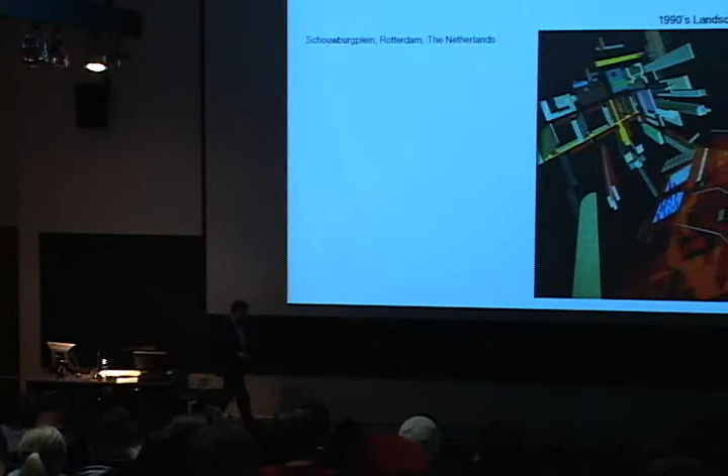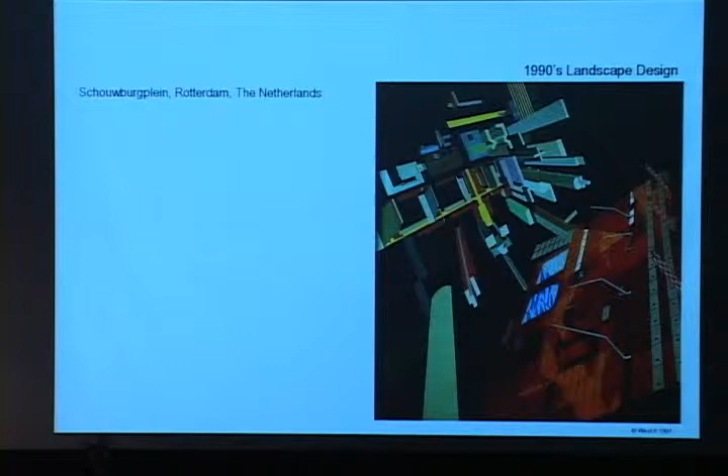The next stage was the 90s when I graduated, and people like Zaha Hadid or Daniel Libeskind, who were theorists and intellectual designers, used their graphics to come up with their own theories in design, and now they're actually practicing architects. On the same note were people like West 8, Adriaan Geuze from Holland, whose work really exemplifies, particularly in landscape architecture, how visual graphics at the time in the 90s was really the message forward.

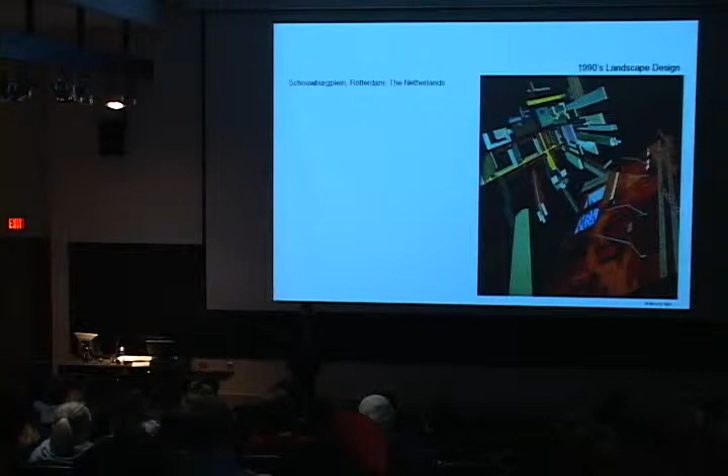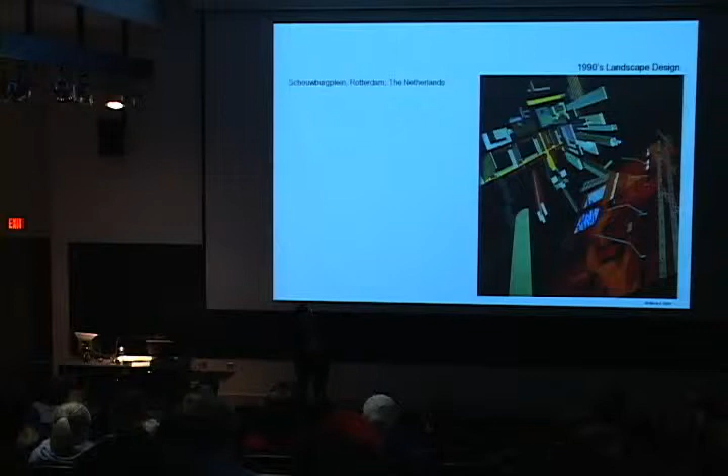It was also the time when, for example, the magazine Topos was created in Germany, which is now available in English. When it started out as a mission at the start of the 90s, it was only published in German, and it was the mission of the editor to actually make it an international journal. It was with these kinds of images that the journal actually got the respect. I thought I'd just recap a little bit on this.

Then we came into the 2000s, the change of the century, and there were people like James Corner who looked, obviously with the reflection of the 90s, at graphic design, but they started to look at design in a much more holistic way.

The way the Fresh Kills site just outside New York exemplifies that in his competition proposal and winner is just one example I wanted to show you as a sort of reminder.

The great thing about his work, apart from looking at it in different layers, is that he also put a time scale to his work. For example, he looked at how a site could be used over the time period, how different parts of the site would change through the involvement or development of the plants, how these spaces would be changing, and how the site could then be used. So he actually put a time scale on it, and there are diagrams.

If you look and read up his stuff, you can actually see that—I always teach that to my students. So he started, apart from looking at it from a graphical point of view, looking at the holistic system.

That was my mission, my vision, having practiced landscape architecture for 17 years—that it was not enough to do graphic work, to look at forms, but we really needed to start to understand the science and the systems holistically as a whole. So just to give you that as background information.

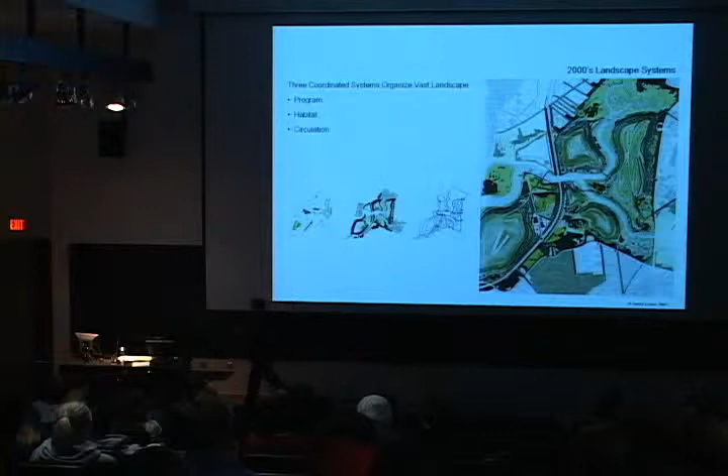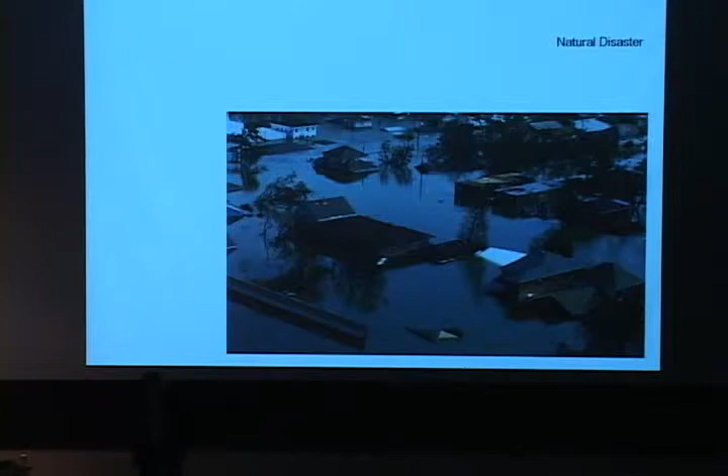Then in the same period, the disasters intensified. We all know that, particularly things like Katrina, which caused disasters in New Orleans. Even then, the then-president Bush acknowledged that the environmental impact and the environmental message from landscape architects was important. That was also an initiative for me when I was thinking about the research we were going to do.

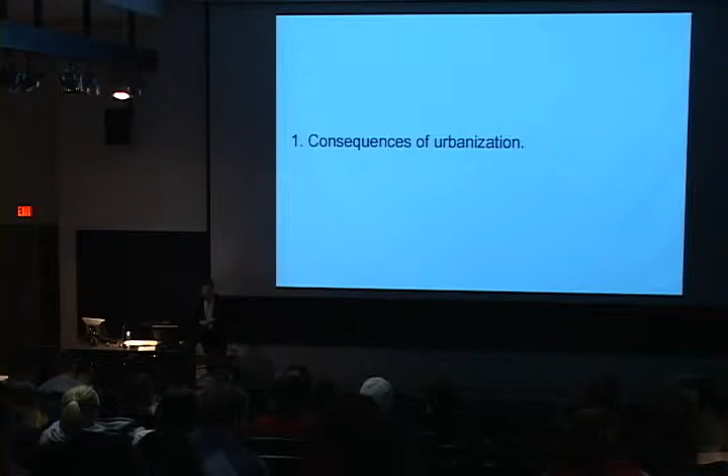We all know last year in 2008, it was the time when the urban population actually was higher, peaking higher than the rural population. So the rural population now is on the decline, while the urban population is on the rise.

So what do you do with all these people? Where do you put them? How do you feed them? Particularly in a city like Vancouver, which is bordered by the sea and by the Rockies, which are literally not buildable on, because being in an earthquake-prone area, this has to be on the flat land.

So densification, obviously, is the answer for this. And with this densification, we all know that has an enormous impact on the environment in the cities and on the environment of nature.

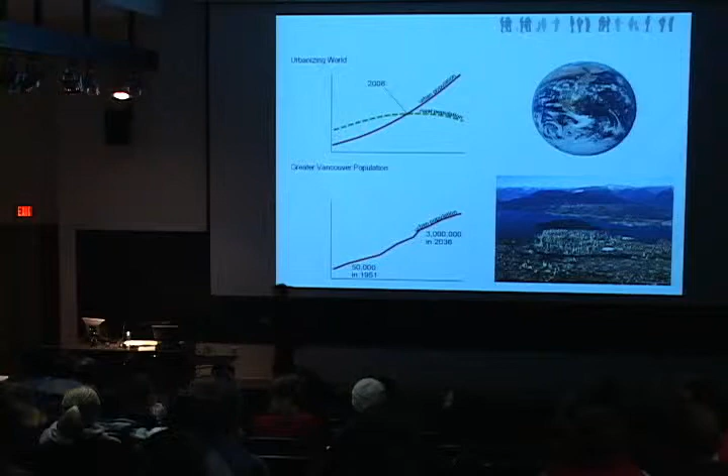So the urban destruction, and with that, the habitat destruction, is still going on. I flew into Atlanta at Christmas to change planes, and this is the sort of images I saw from the plane, and that made me aware again that we still have a long way to go, and we have to really learn to understand the systems. That encouraged me as a landscape architect to go into the science side and really understand the figures, to actually persuade, with the research we are doing, the policy making of the governments. That's the real reason for the research we were thinking of.

So we started to look at it more specifically. What is actually the impact on cities, and what happens if the city gets all this imperviousness? Well, we know sewer overflow will happen. We're going to have flooding, and we will have a degradation of the water, which is the key issue. Food and water is going to be the key issue of this century. I'm quite sure about that.

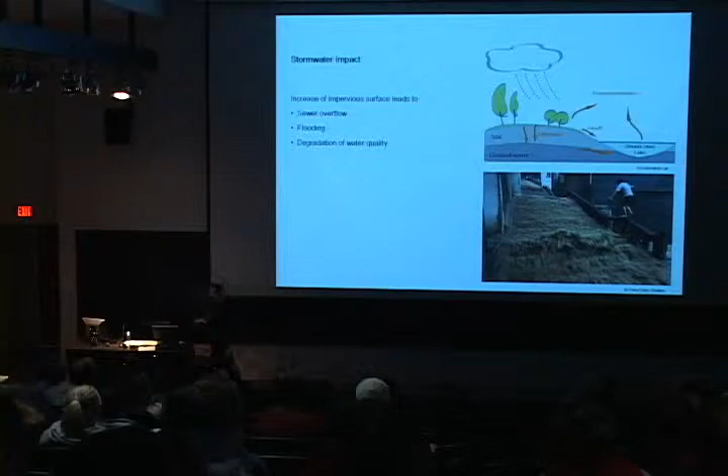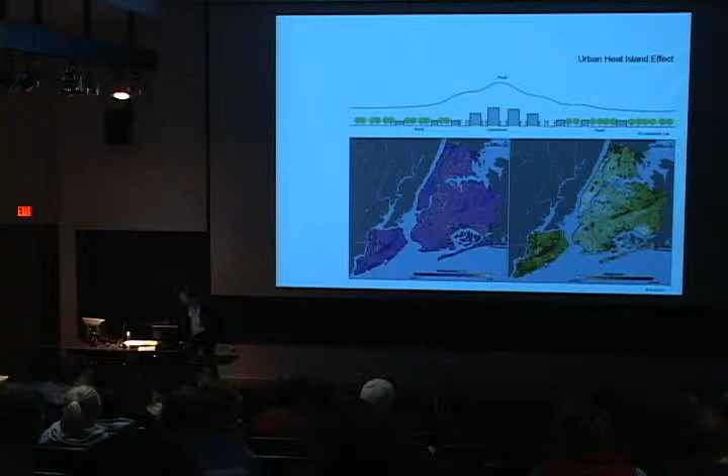I did that together with Herbert Dreiseitl. He was in charge of the lake and the water features, and we were in charge of the extensive and intensive green roof areas. It was a project which went on for 7 years. In 1995, this was quite cutting edge, in the sense that the water we actually harvested on the project was used on the project.

And we also, I had students as second advisor, where we did long-term research after the project was finished to look, for example, at mature trees, how they grow on roofs, and how they function. So this project was the sort of first breeding ground for me about thinking about science and the importance of science in a scheme like this.

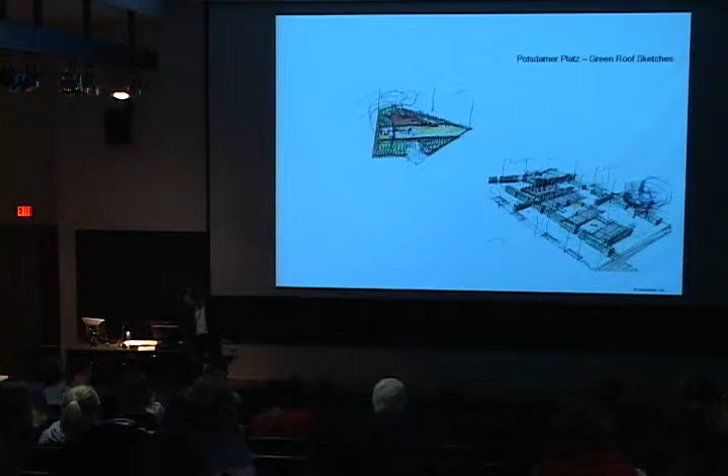This is just another image of the project, and another image that we did all the usual stuff. We did all the design, we did all the sketches, we did all the specs, we did all the stuff one does. On top, we looked at the durability of the materials we used, how they would weather. So I had tests being done on weathering. What kind of wood do we use? Is the wood poisonous or not poisonous for the children play areas? Are there nails in it or not? How do we do the fixing?

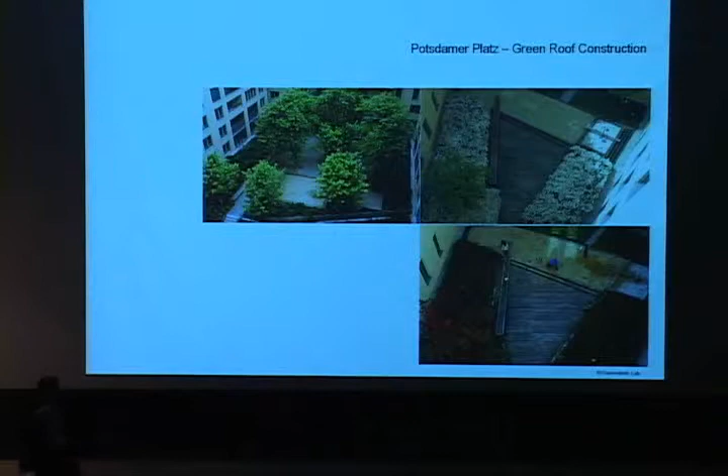So all the sort of basics a landscape architect does. We looked at how the plants over the time of the year would actually grow. I've seen upstairs people looking at charts. I saw in one of the studios today looking at the autumn color patterns, the spring patterns. So we did all that. What you are taught, we actually then tried to practice.

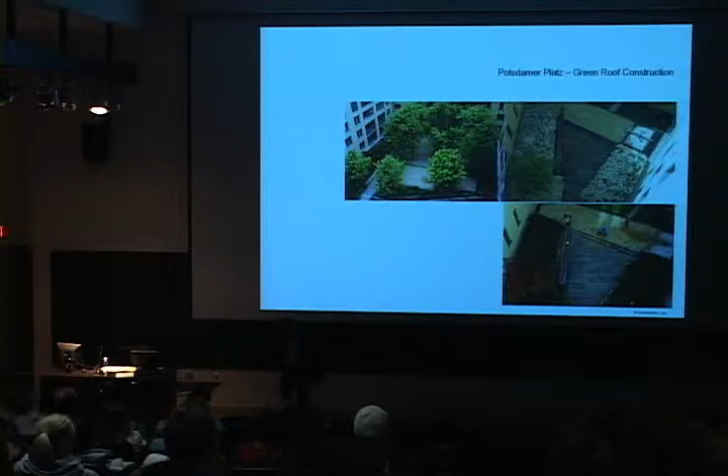But when I was doing this, I was thinking, hey guys, that's not enough.

This is another project I did after the Potsdamer Platz with my mentor. She's a very old landscape architect now who's been in practice for 50 years. And we did this work together. It's also an intensive green roof in Berlin.

But when I was doing all this, I was thinking, hey, is this actually environmentally friendly? Because we're putting in a lot of energy, we're putting in a lot of material to actually create these features. It needs lots of water. So I was thinking when I went into full-time teaching, well, we need to measure this. This is not enough. We all talk about green roofs. It's going to be the healer. I said, well, I really want to know. And is this the right city to actually have green roofs? Because is it an added-on technology?

And obviously, I got lots of criticism, particularly in Germany, where green roofs originally came from, with Switzerland. It was devised in the 70s, really, and it was used for car parks to cover them up so they could be used as gardens and so on. But I always had that question, is it really sustainable?

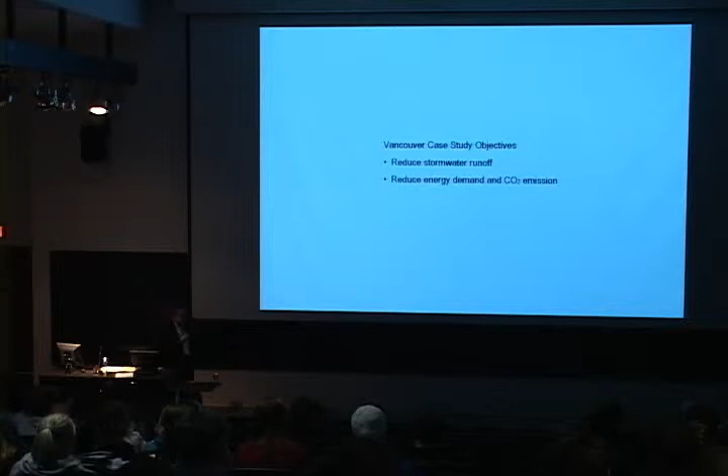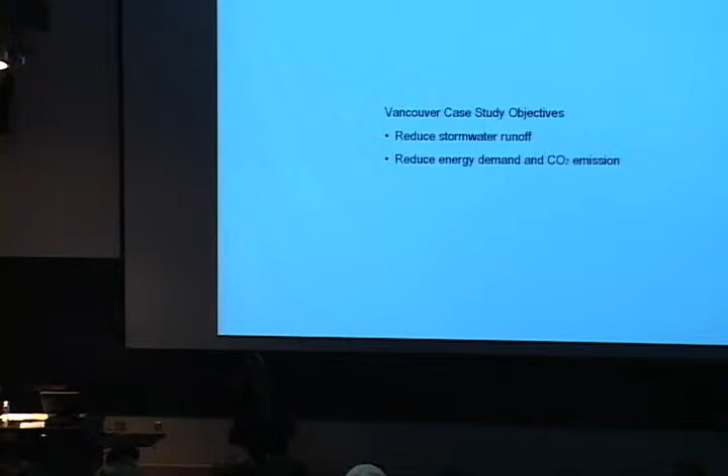So with that in mind, we started our research methodology. I said, okay, we have Vancouver downtown, and we're going to look at Vancouver and see how we could reduce the stormwater runoff in the city of downtown Vancouver. And also, how could we reduce the energy demand and the CO2 emission? Because our mission was, we wanted to measure the environmental benefits green skins actually have in a city. How could we mitigate that?

So we chose, I asked the city government to give me maps. These are very special maps, used by the police for drug trafficking to check where they actually track traffic. So when you zoom in on these maps, you can see every stone on the roofs. These are high-resolution, high-end photographic aerial maps, very sophisticated. Normally you don't get them, and I asked and said I need it for environmental benefits. It's really safe, I'm not into drugs, I want to use it in a positive way.

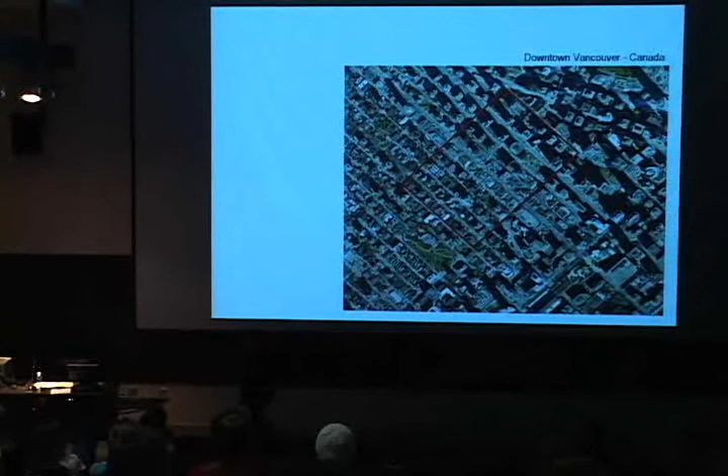So what we did was, I said we're going to take a piece of the downtown core and we're going to measure all these issues. So I chose a site which had all the different building typologies in it: high-rise, medium-rise, and low-rise buildings, as you can see on this section here. And to give you an idea, this is the whole downtown of Vancouver, and we're just looking at 20 hectares of that downtown.

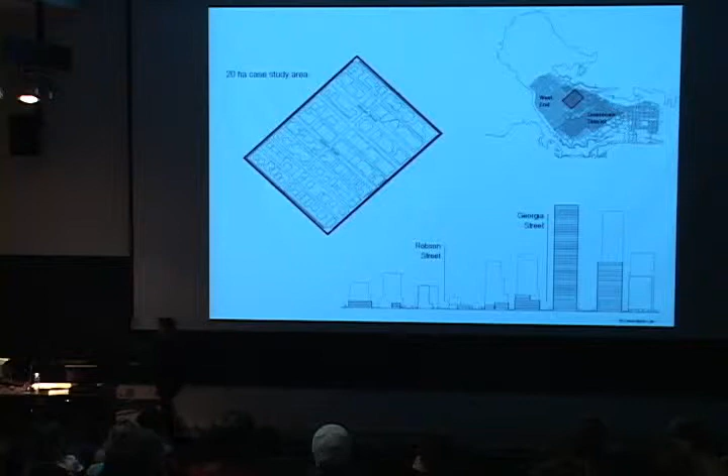So what we did was, the first thing we did was to find out how is it used, how is this area used. So we went to every apartment, and it took a long time, to look at how it's either commercial, residential, office, hotel, townhouses, parking, church space, whatever it is, and made this map so that we knew what was actually going on at the site. The second thing we looked at, and we simplified it in this diagram on the right, we looked at what areas were specifically commercial and what areas were specifically residential.

With that knowledge, and the knowledge of calculating all the roof areas, all the facade areas, and all the floor areas of all those buildings, we were able to calculate the CO2 emission of this 20-hectare area from the electricity and the gas.

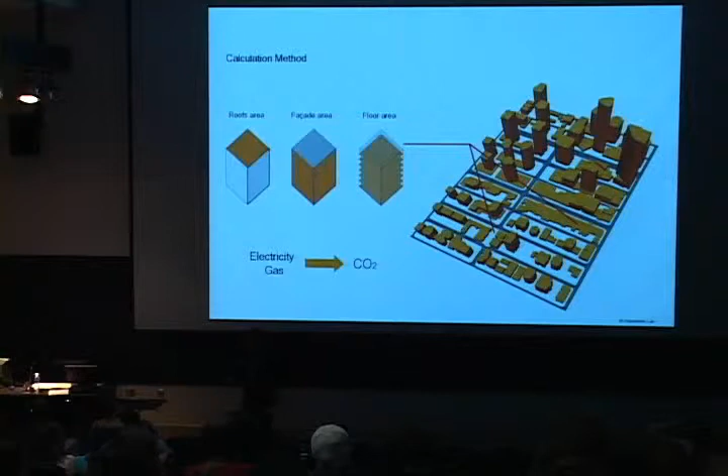How did we do that? We asked the companies to send us all the gas bills of each building, so we were able to calculate how much energy actually was consumed by each of those buildings. I'm not going to go into detail, it was a lot of number crunching.

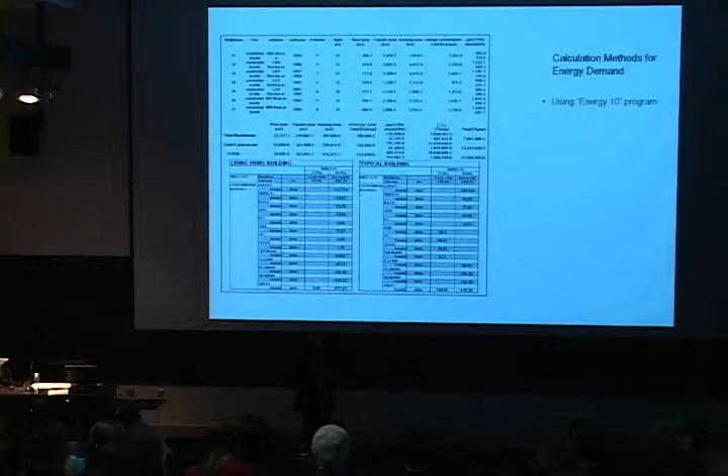For that we used the Energy 10 method. That's one of the methods - there's many, Ecotect, Energy 10 is one of them. It's a simulation program where you can generate these figures, and that would be another lecture to explain. But what this program does is give you a specific simulation of what the actual output is.

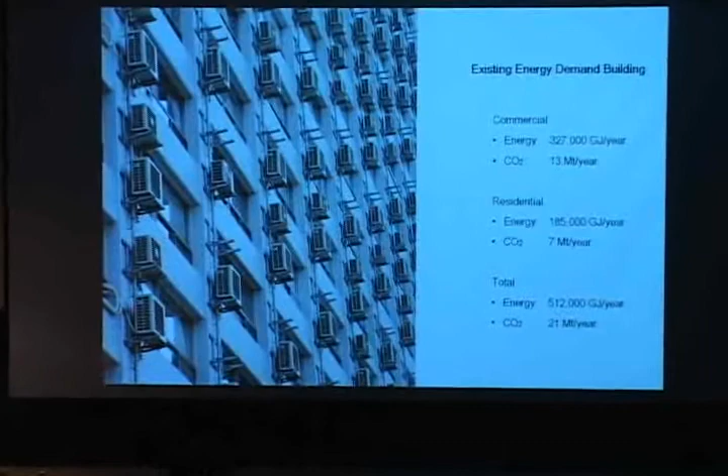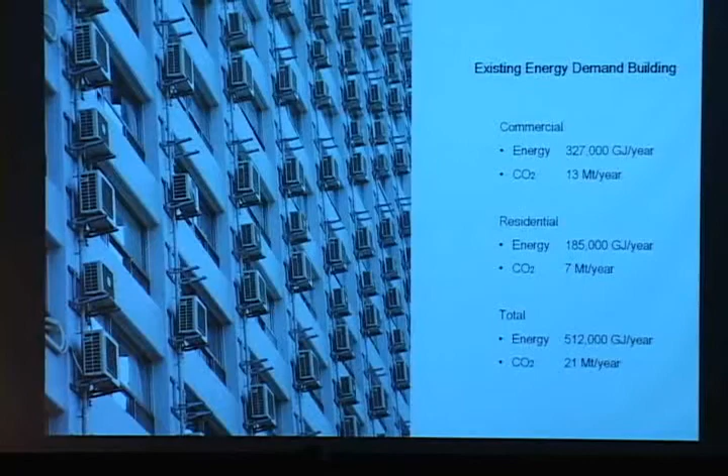When we looked at the result, I'm not going to go through all the figures, just the two main ones: the energy that area needed for heating, cooling, and so on was 512,000 gigajoules per year. And the CO2 emission, which is quite stunning for me, was 21 million tons a year, just for the 20-hectare site. We were a bit shocked about these figures and thought it's really time that we do something about that.

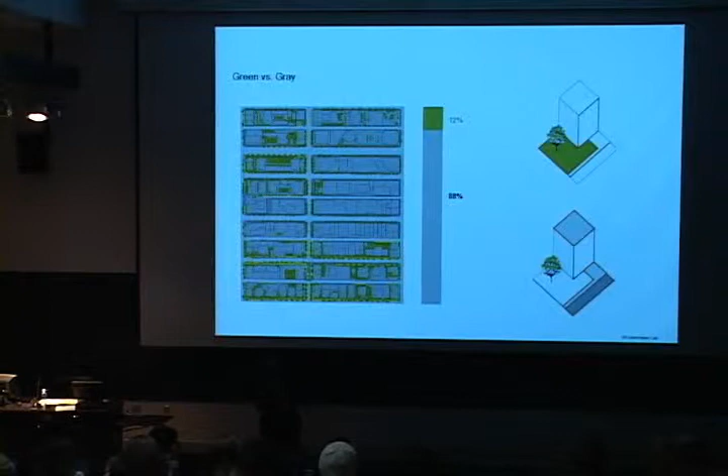So the next thing we looked at is green versus gray. We looked at the site, which part is actually covered by roofs and has an impervious layer, and which part has a connection to the soil. We found that only 12% of the site had a connection to the soil, and 88% was impervious.

So what we did next was calculate in the area all the facades, all the roofs, all the streets, and all the green levels, to work out how many hectares of space we had in each. With that knowledge, we were then able to calculate the stormwater runoff.

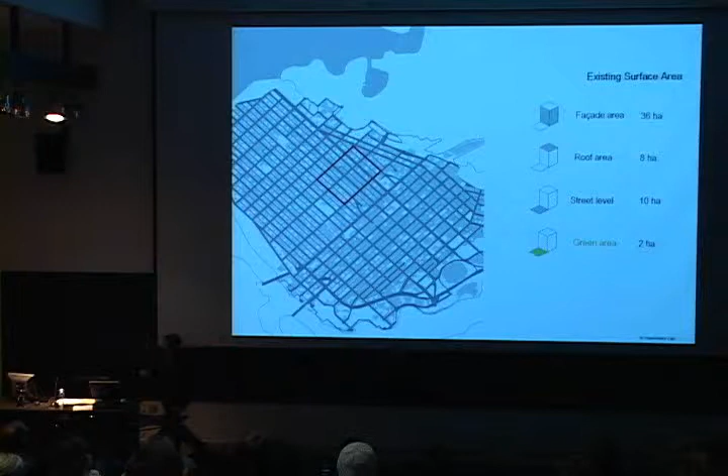For the stormwater runoff, we used the TR55 or CN method. The CN method is the curve number method and the crop coefficient method. The curve number method measures the imperviousness or perviousness of the soil, and the crop coefficient method calculates the evapotranspiration rate of the plants - sorry, it's a difficult word.

So together we developed these formulas. One of my research students spent two years devising a formula methodology to calculate, together with the coefficient and what kind of plants we're actually going to use on the roofs, the stormwater runoff.

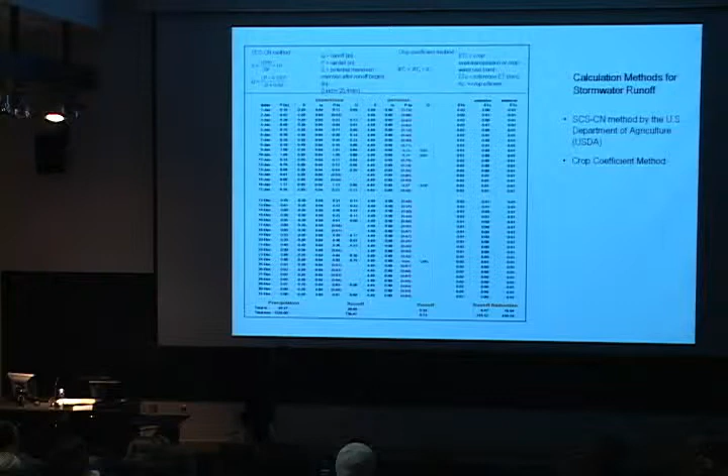I put this into perspective for you, looking at the site. The rooftops together were 56,000 cubic meters a year, and the street level was 88,000 cubic meters a year. So that you understand what that means in volume: just the roof area was 20 American football fields, not German football fields, not soccer fields, American football fields, so the area of 8 hectares.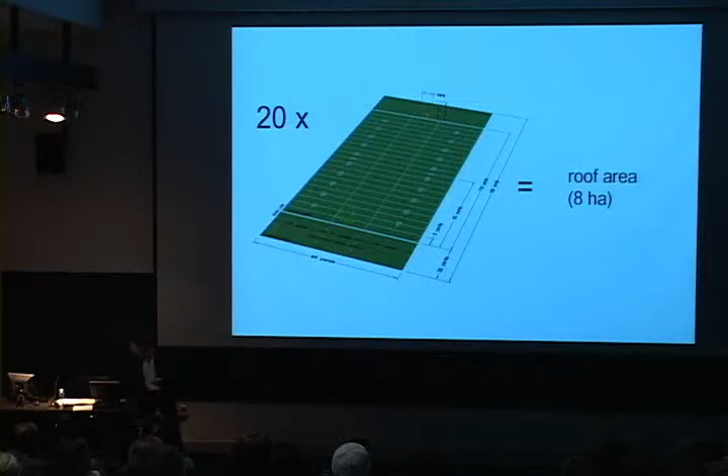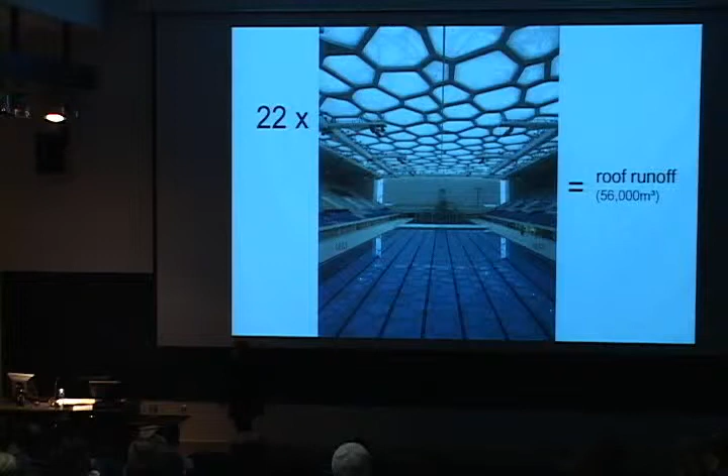And the runoff of this roof was equivalent to 22 Olympic swimming pool stadiums of stormwater runoff - that would be 56,000 cubic meters of water. This is actually the stadium in Beijing by Herzog and de Meuron, and we just used that image because I thought it was very attractive.

So how did we achieve, with that knowledge in mind, how could we achieve the ideal city? What could we as landscape architects now do to mitigate these problems? We were thinking what could be the solution, and we thought we need to look at green roofs, green walls, and green streets. But we need to look at them holistically, in combination - not just a bit here, not just a bit there, but the whole thing, because they only work best combined.

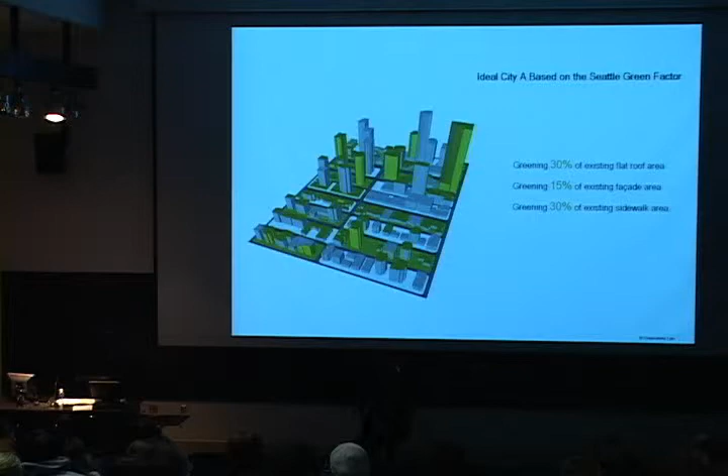So what we did next was calculate, using those methodologies, what that impact would have. For that we used the Seattle Green Factor. The Seattle Green Factor was originally invented in Berlin, Germany, called Biotopflächenfaktor. It was then developed further in Malmö, Sweden, and then the Americans in Seattle got hold of this and developed the Green Factor.

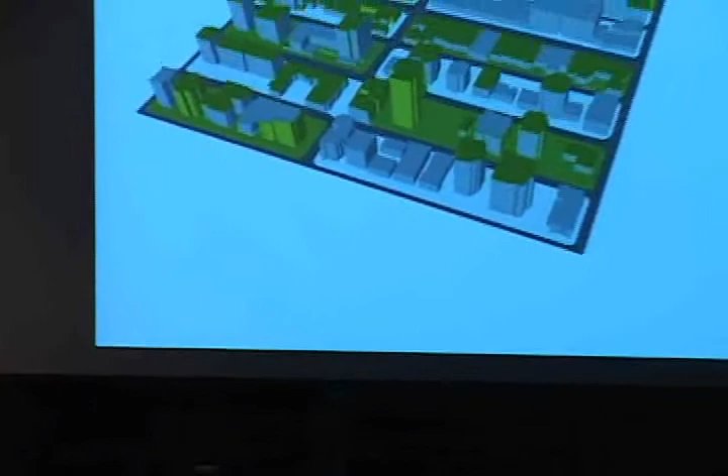The Green Factor specifies for an area of land, if you have a certain amount of that greened up, then it would be beneficial or have an environmental benefit on the plants. That amount can be calculated by looking at different kinds of greening up - for example, using a green roof, using different kinds of plants, and also the soil depth.

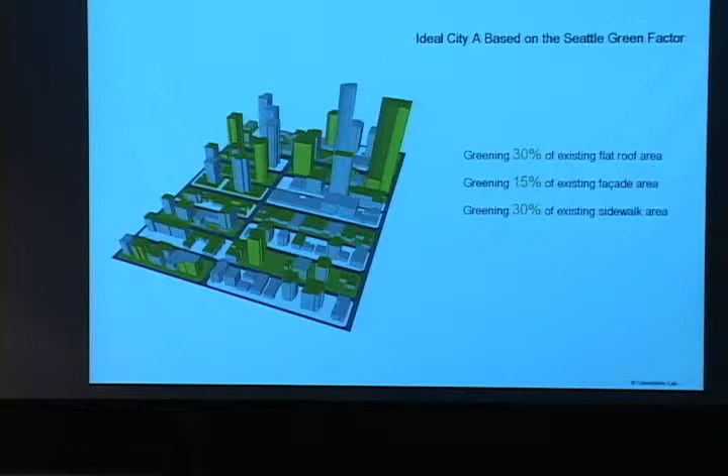The soil depth also had a big implication on that. So it was really important for us to try that out, because it was research which had been done before and where we knew that it would work.

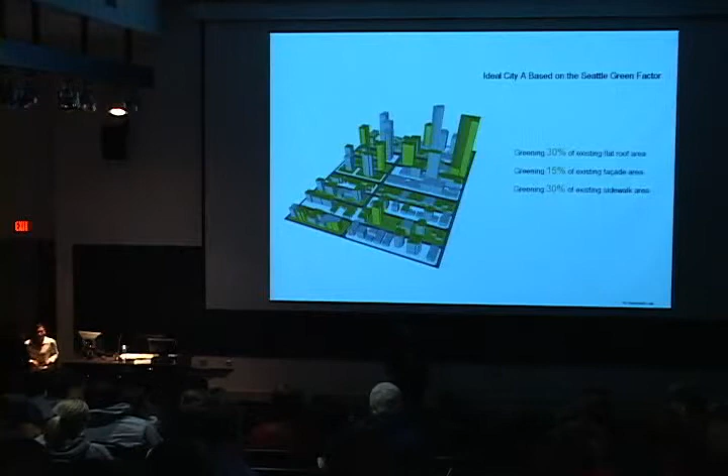So what we tried to do was we took the site as it is and we greened 30% of the flat roofs. And then we also greened 15% of the facades and 30% of the streets to find out how much

we actually could reduce the runoff. With the 15% on the facade, we could reduce the runoff by 6%. With the extensive roofs, we could reduce the runoff by 4%. The reason why that is lower is because on the facade, more water can actually percolate down, and it will percolate down faster than on the roof. It will stay there more in position.

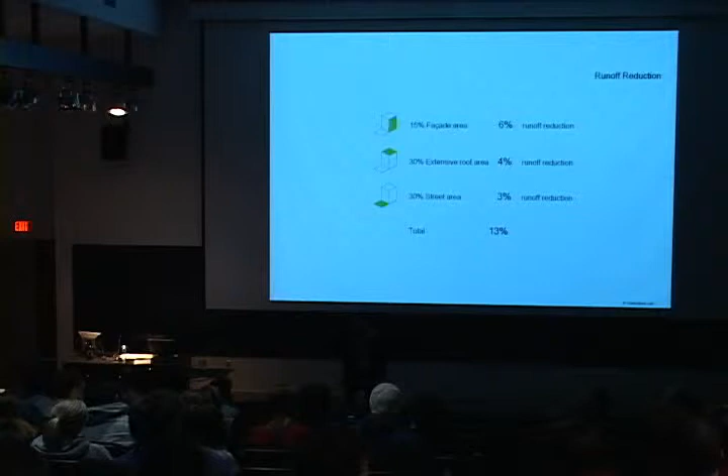So it's a physicality issue. And the third one, for the streets, 3% runoff. So overall, with these interventions, if we would introduce those, 13% of the runoff would be reduced just by these small incentives like the green roofs.

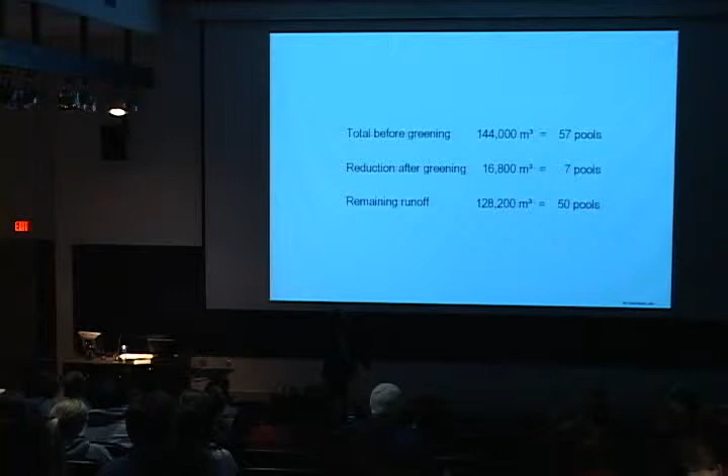To give you that in the pools again, this would be 57 pools overall, and we would reduce it by 7 pools. We would have only 50 pools instead of 57. So we thought that was also a very good aspect and a very good way forward to think about this.

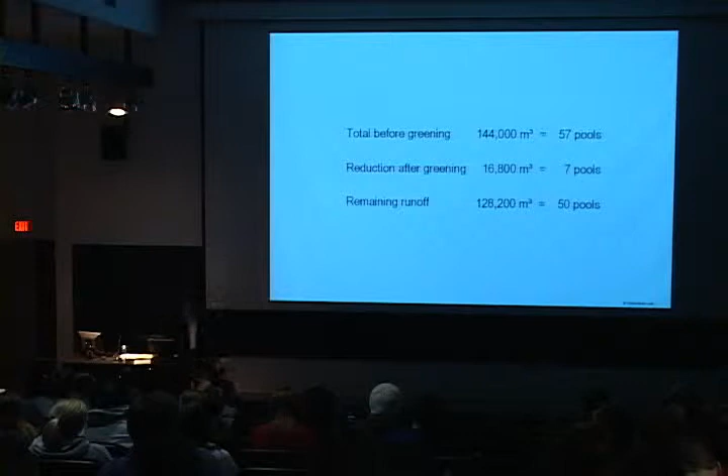The next thing we looked at was the energy demand and the CO2 emission. Using these interventions, we could actually reduce the energy of the facade by 3%. And we could reduce the CO2 emission by 5% because of that, because we don't have to heat so much. With the extensive roofs, we could reduce it by 6%, and 7% CO2 emission reduction also because of that.

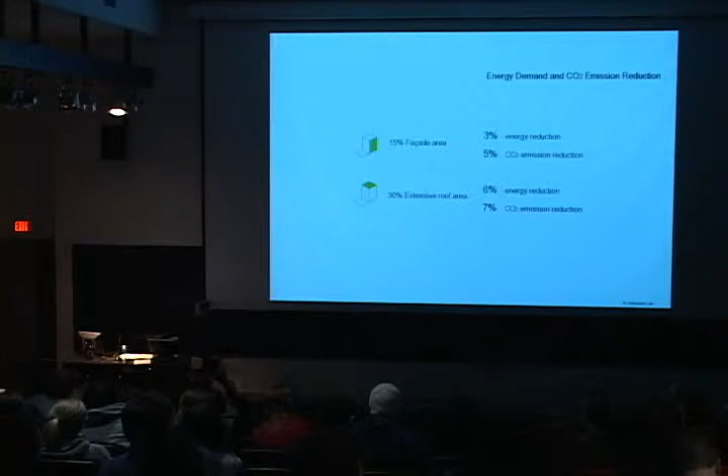So we found out overall, using these interventions, we could reduce, using the Seattle Green Factor, 9% of the energy and 12% of the CO2 emission. If you think about that in the million tons I was explaining to you before, that's a good deal for a start. And then we thought,

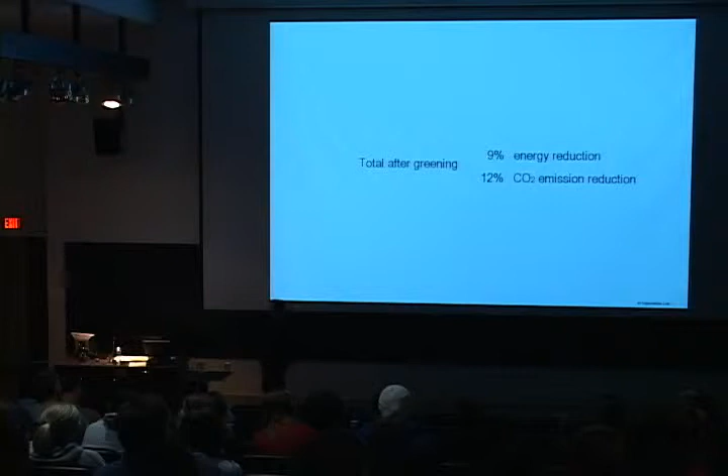in Vancouver, we want to get more aggressive. This is not enough. We want to build on top of the research which has already been done, not just do the same and apply it. We want to do more. And the idea behind this is to get the policymakers in a city like Vancouver to act.

Because with the numerical figures, they are able to persuade the governments to make it into a law so that everybody has to use those. Because currently the Seattle Green Factor is only used on public buildings, not on private buildings. And we are interested that all the new buildings need to have that, and if possible also a retrofitting of the old buildings.

So we introduced on top our bit of green technology. In this one, we wanted to use photovoltaic panels which produce electricity directly, and we wanted to use thermal panels which produce warm water. So these two together, combined with the other three, we wanted to add this on and see what we came up with in the end.

So we added on 30% of green technology on the roofs and 25% on the facades, plus another 10% on the facades of greening. And the reason why we can't do more is because on the north side of the buildings, the greenery of the facades won't grow as much.

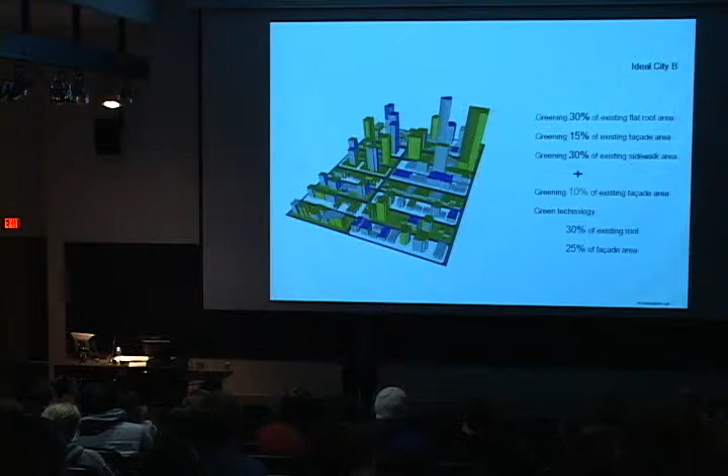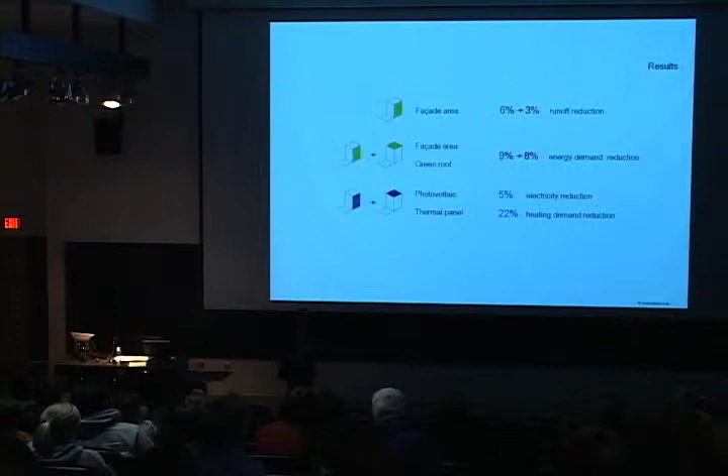The impact that had was that on top of the 6%, we would get another 3% of runoff reduction on the facade areas. And we would also, on the facade areas and the green roofs together, reduce the energy demand by another 8%. So that had a big impact. And on top of that, the photovoltaic and the thermal panels gave a 5% electricity reduction and a 22% heating demand reduction on the buildings, which is a big amount.

So with these sort of interventions overall, we realized that it would have an impressive impact on any city. So the next thing we were doing, we were dreaming about this and photoshopping how we would see Vancouver, the ideal city, being created.

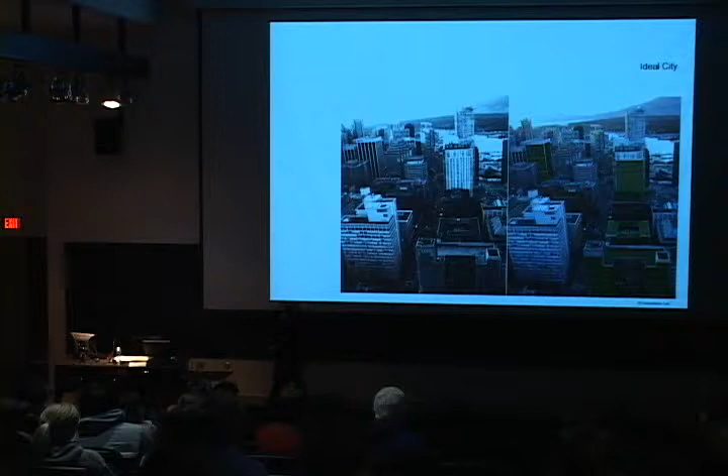We made some images just for us to see how that would work, the facades being greened, the roofs being greened, or the roofs being used like here for urban agriculture. I'm going to talk about that in a minute. So that was sort of our first mission.

Then we said, okay, that's Vancouver. But how does this work in other cities, and how does the climate actually influence the green roofs?

And this will work better for you. Okay. There you go. Okay. Don't have to shout so much.

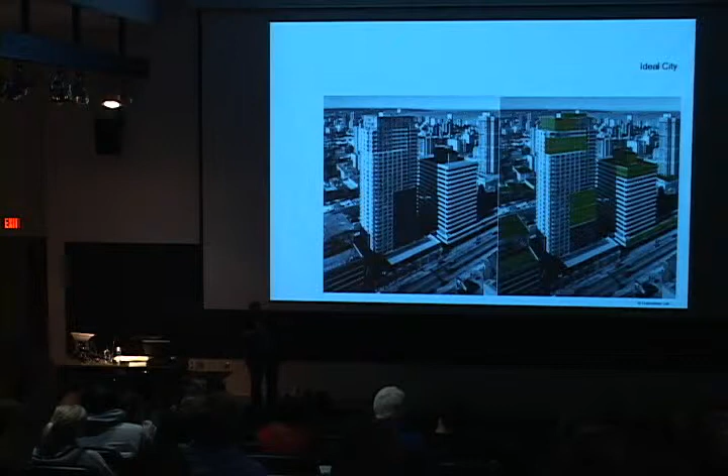That's good. So how would that influence green roofs? So we were sort of thinking, let's try to apply this to other cities. And what we were looking for is a city which had a completely different climate pattern, because we wanted to be sure that what we were actually researching made sense in the larger picture. So we chose a city called Kelowna. Kelowna is about 400 miles to the east of Vancouver. It's a desert. It's in the middle of the Rockies. It's very hot, and it's got a very different climate.

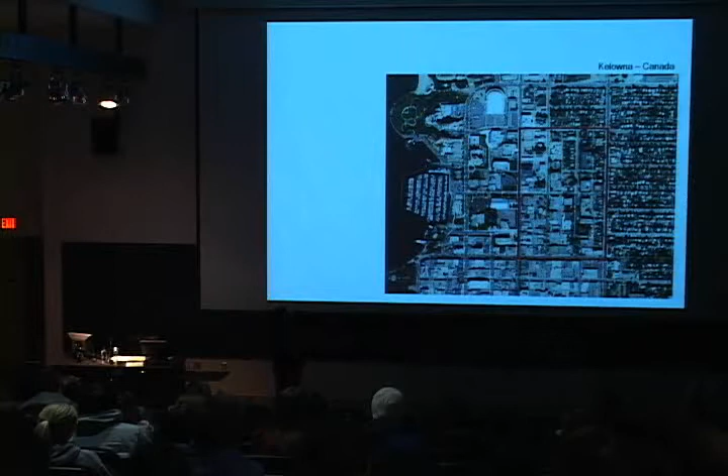And while we were there, we were sort of thinking, okay, because this figure crunching was so much, we're going to specifically this time around just look firstly to see if it has any impact on the green roofs and see what will happen to them. So we chose another map from the government and did the same procedure as in the last scheme, where we measured it and we looked at the buildings.

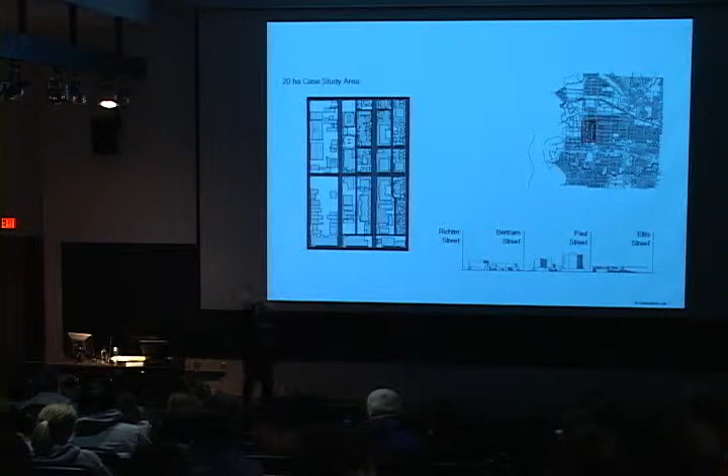And this time around, we found out it was literally the same situation as in Vancouver. There was a bit more greenery, but generally, even though it was a small town in comparison to Vancouver, quite a lot of impervious surface. And the reason was because there was so much car parking in the downtown, and that obviously made so much impervious surface. So the same situation again.

So when we applied our research, just to recap quickly what extensive and intensive green roof means. Extensive green roof means a very shallow soil depth, 10 to 15 centimeters, no irrigation, sedums, small plants, mostly plants which can store water a lot. That's extensive green roof. No maintenance, maybe one time a year weeding of the plants.

Intensive roof means large soil depth, irrigation, which means energy again, and also you can grow literally everything you like, from a tree to a shrub. So just to specify these issues briefly.

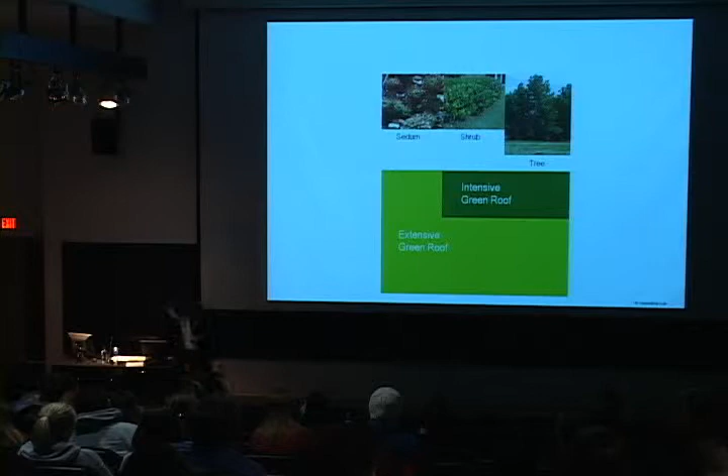So we were thinking the only way we could, for a policy for the city to recommend this, would be saying, okay, either you irrigate 54 millimeters a year on top, and you can have a really thin soil depth, or you increase the soil depth and keep some of the winter moisture, or you leave the same soil depth and you put in water tanks, sort of like drainage elements, which can keep some of the water. So to make sure that there's enough water for the drought in summer.

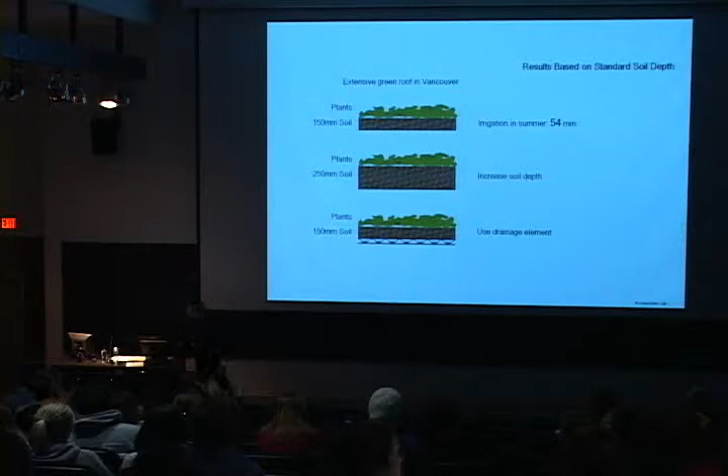Then we looked at Kelowna and we realized it doesn't rain much at all. And we still have the same issue. Because of the higher evaporation rate, the plants, both the extensive and intensive, would need more water. So the only way we could then recommend green roofs in Kelowna was that we said, okay, we only green 44% of the roof.

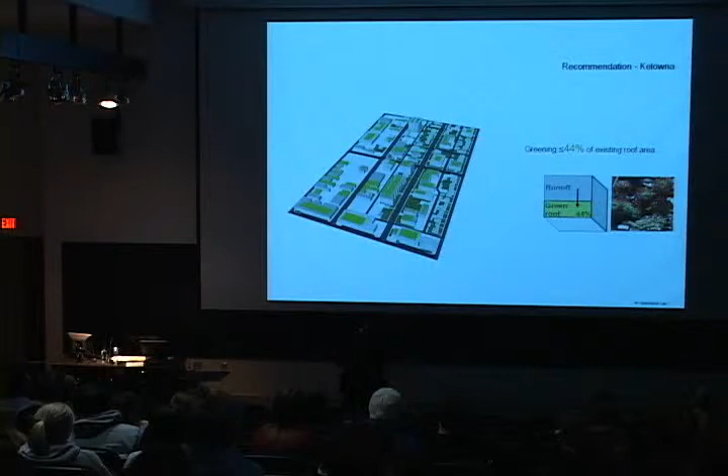And that's what we work for: if a policymaker wants to make this a policy, we couldn't recommend him to say, okay, you need to green every roof. It's not going to work. Only 44%, and the rest of each roof should be used for harvesting the water, and that water should then go on the 44% so that the roof can survive.

With this methodology, I'm just trying to explain to you how important it is to actually do these numerical figures. So when you design a green roof, it's not just there just because it's sustainable. There are areas where it's just not going to work. So these are the sort of issues I'm trying to address to you, that if we really want to be thorough in what we do, we really need to understand the science behind this.

So this dream idea, which we've drawn up here, is never going to work with the climate pattern we have in Kelowna. So the only way we could suggest it to the policymakers is that all the water from the car parks is swaled, cleaned, and then pumped up, which again costs energy. Then you could have that effect.

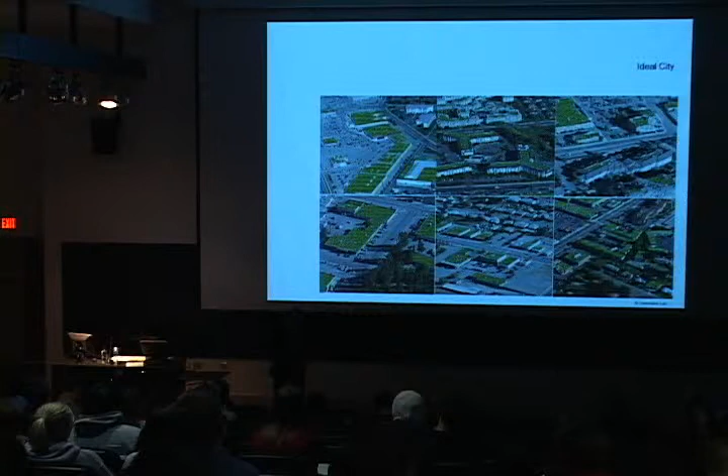By that I mean you have to be really careful with your assumptions when to put, for example, a green roof in a situation. So it is much more complex than designing forms and shapes and really understanding those. You need to add on the scientific aspect and understanding the knowledge. And obviously not every one of us has the time to do this, but if you're not sure, we need to go out to people who know and who can help us in this situation.

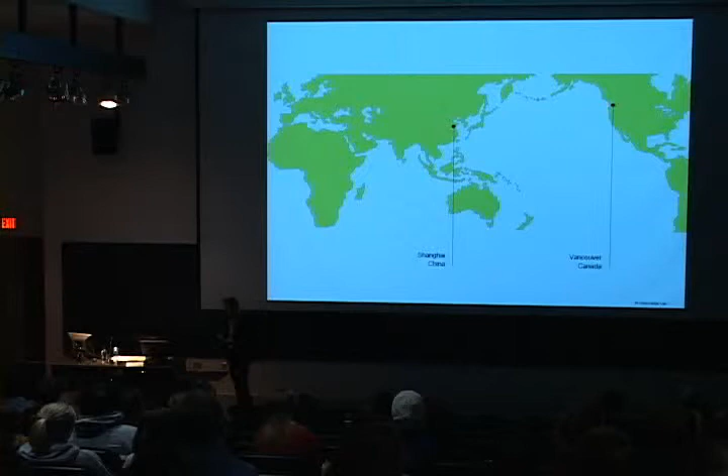So the next one was looking at Shanghai. And Shanghai is very different, and I will explain that in a minute. We again got a map, but this time around, because of the block structure in Shanghai, they are much smaller. They are 2.3 hectares in size, so we had to use a different formula, but at the end of the day, it worked the same way. So the same procedure, 12% and 88% is impervious. So we had literally the same as Vancouver.

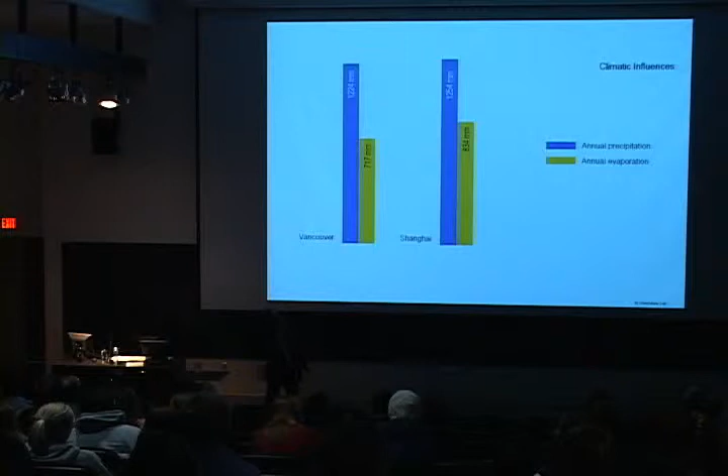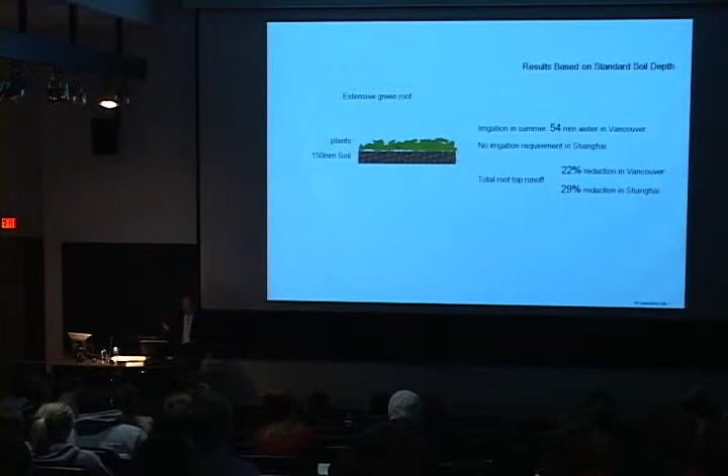When the plants need the most water, that's when the green roofs really need it, particularly if you do an intensive green roof. So these graphs show how the climate and other aspects are interwoven with the plants. So basically what that means is for Vancouver, we would need to recommend to the policymakers, for example, that you still need to irrigate 54 millimeters, but in Shanghai, you wouldn't need to irrigate at all.

And then the roof runoff in Vancouver, the stormwater runoff, would be reduced by 22%, while in Shanghai it would be reduced by 29%. So you would even have a better runoff rate there too. When you look at the intensive green roof, you would actually have to irrigate even more in Vancouver, 133 millimeters, and still no irrigation in Shanghai. And you would actually reduce the stormwater by 40% in Vancouver and even higher, by 57%, in Shanghai.

So basically what these figures show us is that, for example, Shanghai would be an excellent place to do green roofs and green interventions and green facades and all these other things. So not every city is the right place for this kind of intervention. With this theory, I'm just trying to explain to you that when we use the term sustainability, we need to be really careful and really understand the system before we use it. So I think not every city is useful for green roofs.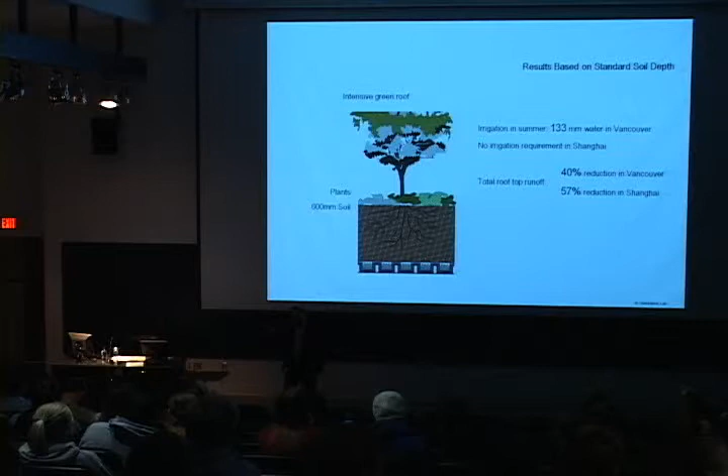For example, Vancouver, I think, also has a problem in summer, particularly when it comes to intensive green roofs. So if we want to employ, for example, green roofs in Vancouver, we need to harvest water so that they can actually be irrigated. So these implications then have implications on other things like water harvesting and so on. So with that, I'm just trying to explain to you how important it is to look at the systems holistically.

Currently, we are also looking at green streets. And if you ever have the chance, go to Portland, see Tom Liptan. Tom Liptan's work is really advanced in this field because they had so many problems with the stormwater in Portland. They developed and devised all these swale and rain garden systems. And I took my students there last year, and they really appreciated this visit. And that inspired us in the lab to look at our own streets.

And in Vancouver, we have a density policy. It's called the eco-density policy. And what it does is it takes the back streets, the back lanes, and all the former garages on the back lanes are going to be made into more flats to accommodate all the increased population which is going to happen in Vancouver. And with that updating, there will be more green roofs and there will be more stormwater.

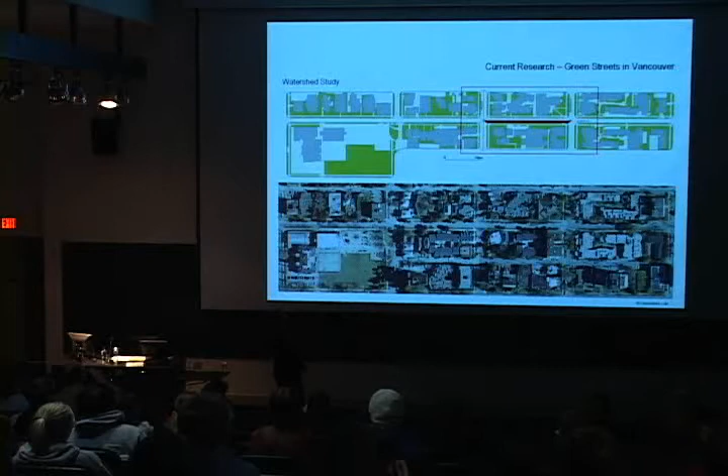So we are researching, and this is our watershed area, how we could actually accommodate and put the water back into the natural cycle on site. And we had two scenarios. One scenario, at the end of the road, we have these sort of rain gardens and the water is swaled into them. Or the other scenario was that we proposed to have these green strips, so kind of swales, so the water velocity, the water speed is reduced in the storm event, and a lot of it percolates already in here, and then the rest is drained into the soil in these smaller rain gardens.

So we currently wrote a research paper on how that would work out and how the figures are. Basically, why I'm showing you that is we really need to look at these things holistically and understand all the links between them. Now, how does that go with my teaching? How do I use this research to introduce it to the students?

So last year, I did the intro studio for the second time, and the idea behind this studio was the usual stuff they have to learn in the first studio, all the skills, sections, plans, and everything. And I'm teaching at the master level, and we have students coming from all over the place, and some of them have never drawn. So it is quite a tough studio for people who have not had an education in architecture or landscape architecture before.

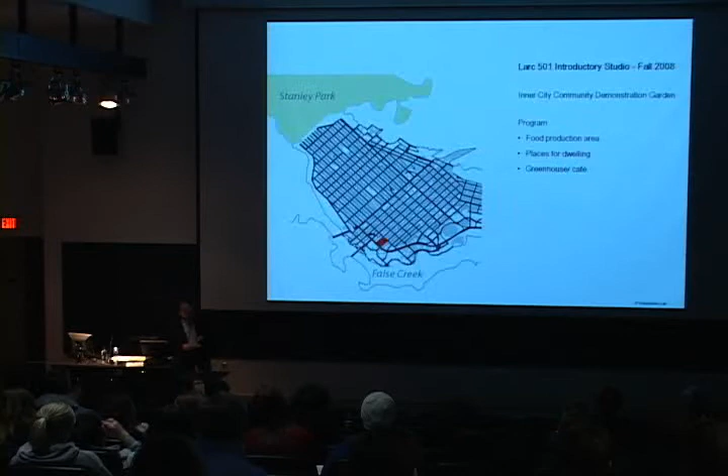So I looked at the food security issue in Vancouver, and we chose a site in the downtown, the red site there, and we proposed an inner city community demonstration garden project. And in this project, I programmed the food production, places for dwelling, a greenhouse, and a cafe. And the idea behind this was that the students in the first semester also had to learn about architecture, that they actually had to design the buildings, not obviously specifically like architects, but they had to get an understanding between the inside and the outside to make them aware how important that process is, because it also has to do with sustainability, for example, harvesting the water on the roofs.

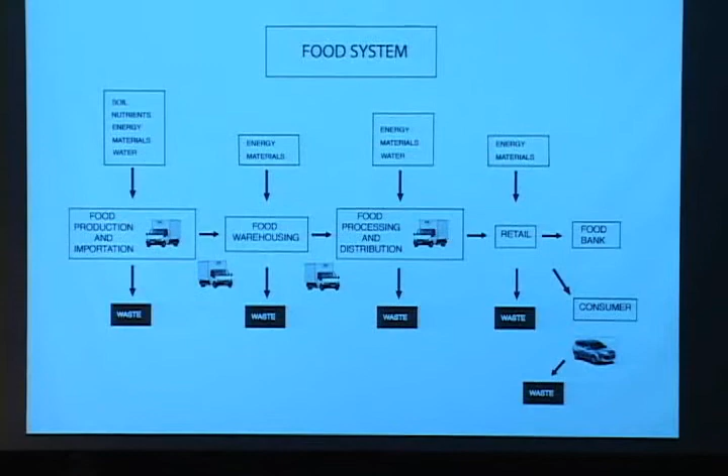So they had to do all the typical standard analysis, which we all do when we do a project, and on top I asked them to look at systems. And I asked them, for example, to look at the food system and analyze how it is now, how things actually come to Vancouver, how the food is distributed, and how much waste it actually produces, and so on. And they came up with these diagrams.

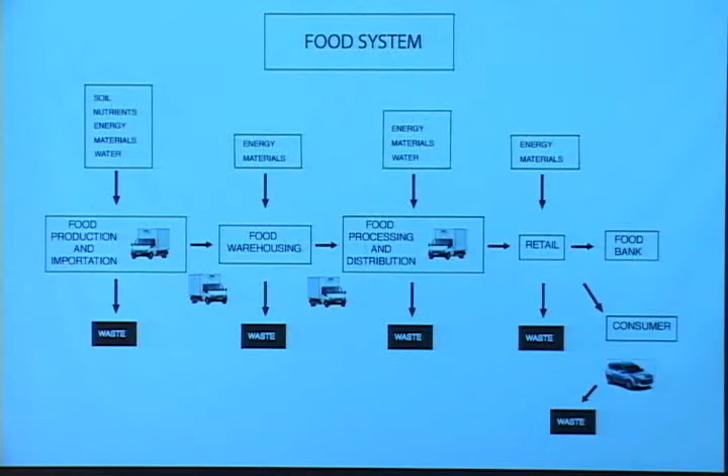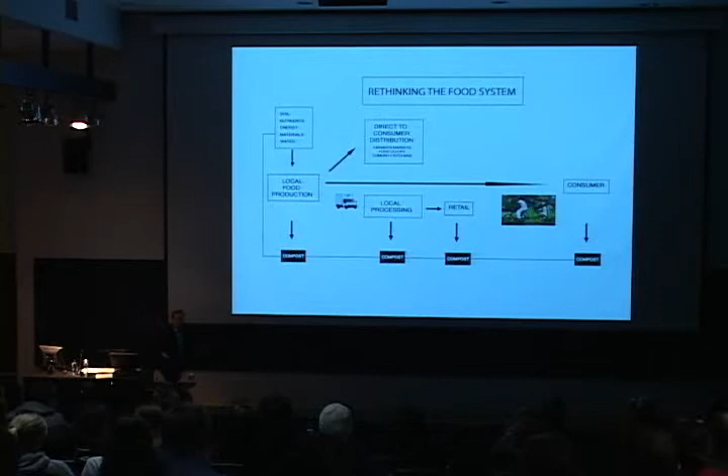And then I asked them on top to look at how they would see the food distribution could be improved. So they came up with this diagram that at all the different stages, the material should be composted and so on. They should be locally produced. There shouldn't be so much energy wasted with vehicles to transport things. So they were starting to get a sensitivity and an understanding of how the environment could be improved with this simple, logical thinking process, without technology, without even green roofs, just by thinking locally in a sense of local production and what the area one lives in can actually do.

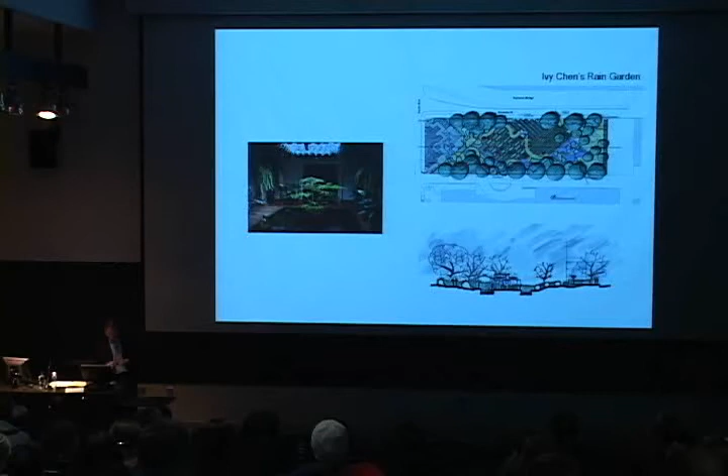And I brought you 4 projects just to give you an insight into what they then produced. For example, Ivy here, apart from producing the production beds, created this huge glass house, which was not just a glass house, but also a funnel to harvest water, which then was partially used for the irrigation and partially used as a stream in the garden.

The critique, which is always happening in Vancouver currently, is that the community gardens and food production areas all look messy and they're architecturally not sound, and the public is not happy about them. So we as landscape architects can use our aesthetic education to improve those areas. That was sort of the idea behind this.

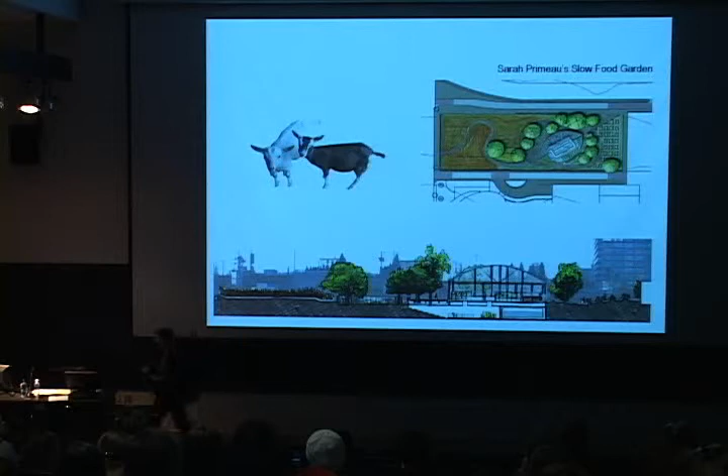The second one was Sarah, for example. She designed this cornfield, and the corn was used in a bakery to bake local bread. She was even thinking in section about how the building actually functions in relation to the landscape, and all these interrelated aspects, which is pretty good for a first-year landscape student. I thought that was something we all need to think about today when we design.

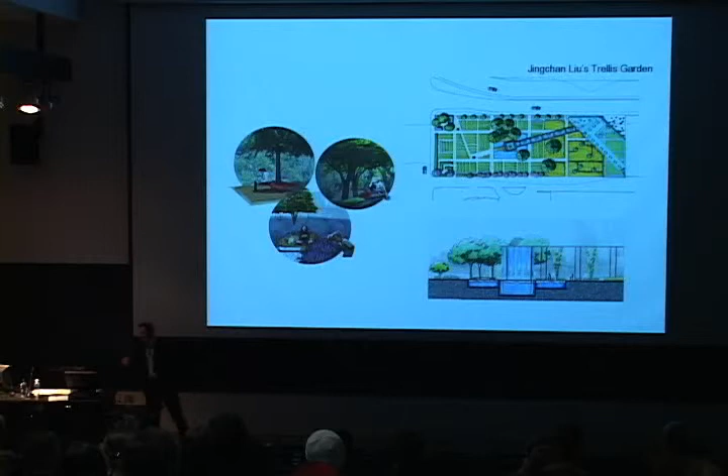In my studio, they are not allowed to draw with the computer, and the reason is because it's maybe the only studio they can. They're allowed to do Photoshop and things like that on the side, but when it comes to drawing, all their drawings need to be by hand so they can get an understanding for the skill and learn fast sketching for the development of their methodology.

And this is the final one by Jingchan Liu, who developed this grid system and module system and used that for her architectural expression, and also devised this little diagram looking at water and how it could be harvested in a certain way.

What you have to remember is this is in the downtown core of Vancouver. It's seen really clearly here—these are high-rise buildings, so they had to look at the shadow patterns and how that integrated, and what kinds of plants they could actually grow in this area. So, look, it was a very sophisticated project for an introductory studio.

So as a last point, I wanted to briefly talk about how I practice what I preach—how do I integrate this knowledge in my own research and my own practice? My lab is currently starting to set up a practice again. I registered in Canada now, and so I thought, how can I introduce this science knowledge into my experience as a landscape architect?

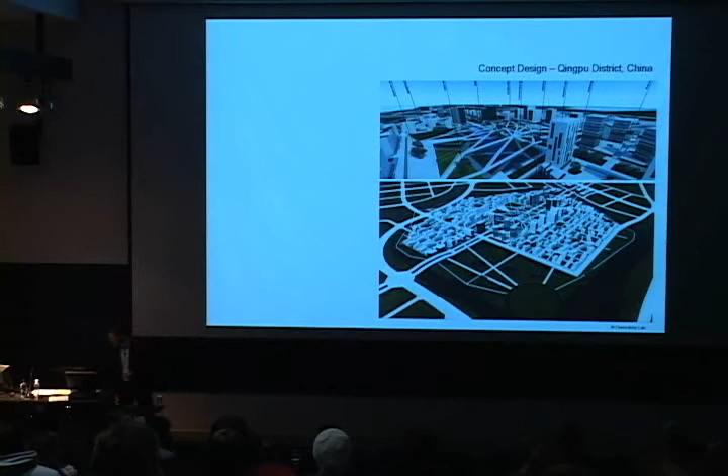So last week we handed in this competition in China with an architecture team working from Sydney and India, and ourselves working in Vancouver. The idea behind this master plan was not just the slick design and the green spaces we created. I said to my architecture colleagues, that's not enough—we can't hand this in like that. So we added a sheet and did all the calculations for the area, so that what we were dreaming of, the roof gardens or outdoor garden areas, there was actually enough water to irrigate them.

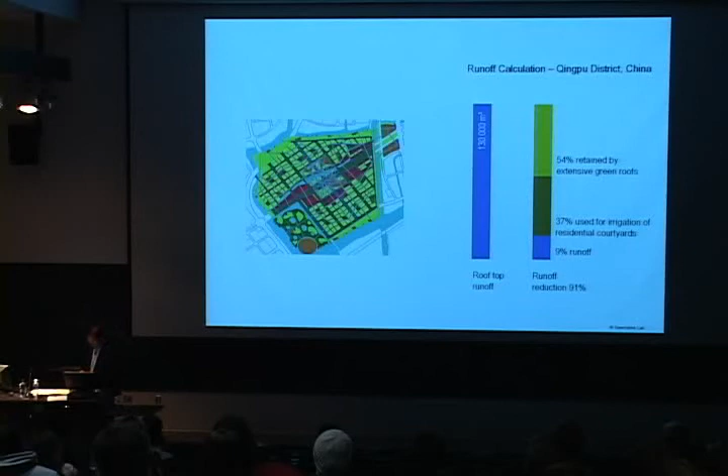So we got the data from Qingpu District outside Shanghai to calculate it all through—the actual runoff from the roofs and how it would be used on the site. 54% would be retained on the extensive roofs, 37% would be used for irrigation of the gardens on the site, and only 9% would be runoff. So we wanted to really be sure that what we were dreaming of in this project was actually functioning.

So my conclusion is that as a teacher, we need to make science accessible to students, from the first semester onwards. It needs to be integrated into the curriculum for them to understand that this is really important for the thoroughness of their work. And I think for us as practitioners, in-depth research is really important too, particularly numerical results. With that we can create much more rigorous landscape interventions instead of doing it without these kinds of thoughts. So I just leave you with that, and thank you very much.